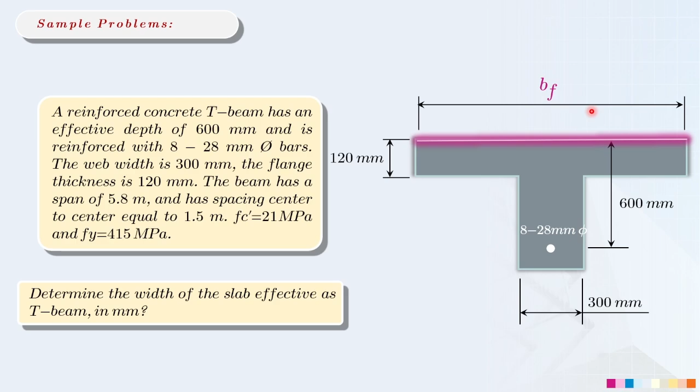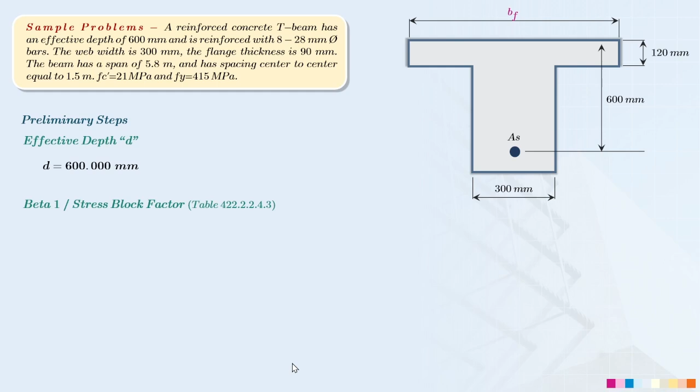and this width of the web which is equal to 300 millimeter. Okay? So ang goal natin dito for this portion of the sample problem is we need to determine first this width of the flange kasi yan yung gagamitin natin later on when we are considering the nominal moment or the bending moment of this section. Okay? So first, let's determine what is the effective depth, which is given tayo ng 600 millimeters. And then determine muna natin dito yung stress block factor or the value of the beta 1, which is dependent with your F prime C, which is 21 megapascal. So your beta 1 here is equal to 0.85.

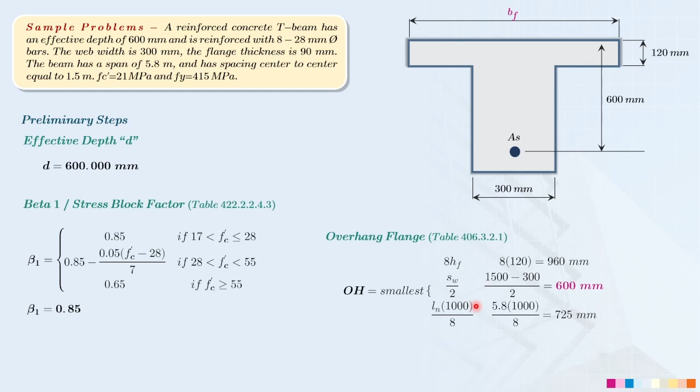Now, let's solve for the value for our overhang flange. Kasi since interior beam yung pinag-uusapan natin dito, ibig sabihin lang nito dapat ang i-consider mo ditong overhang flange is dalawa at magkabilaan sila. So kapag na-solve mo yung value ng overhang flange from this provision, you need to add this width para makuha natin dito yung total span ng ating flange itself. Okay. So these are the criteria. So tatlo lang naman siya sa ating interior beam. So first is the 8 times the thickness of the flange or thickness of the slab, and then clear span over 2. So clear span between the beams, then you need to divide it by 2. And lastly, the clear span of the beam which is divided by 8. Okay? So kailangan natin makuha dito kung sino yung pinakamaliit sa kanilang tatlo.

So first, on the first criteria, which is 8 times the thickness of the flange, so 8 times 120, ang lalabas dito is 960 millimeter. On the second one, which is yung clear span, please take note na yung clear span dito, kailangan interior beams. So please take note na yung given natin na center-to-center span, which is 1500, you need to divide it to the half of the beam, which is 300 over 2. Kaya lang kasi, kapag clear span, kailangan dalawang beam ang i-consider mo or assume dito na may katabi pa siyang isa pang beam. That's why 300 over 2 plus 300 over 2 ay mag-equal lang po siya sa 300 millimeters. That's why kung makikita nyo dito, naka 300 millimeters na po siya. Over 2, this is equal to 600 millimeter. Yan yung pangalawa nating criteria.

Then, sa last criteria natin, this is clear span of the length over 8. However, ang given dito is 5.8 meters. Para consistent siya with the two criteria, minultiply ko lang siya with 1,000 para ang lalabas sa kanya ay in terms of millimeter. So the third condition here is now equal to 725 millimeter. Now, according to our provision in conjunction with this table 406.3.2.1, we need to choose what is the smallest. So, sino ang pinakamaliit sa kanilang tatlo? So, ang pipiliin natin dito, of course, the second criteria, which is equal to 600 millimeters.

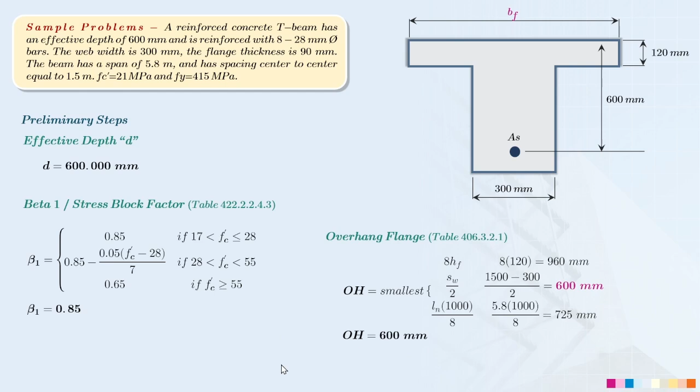Okay? Now, hindi pa tayo tapos dyan. Kasi ang hinahanap sa ating sample problem is the value for our width of the flange itself. Ang nakukuha pa lang natin dito ay overhang flange pa lang or etong nasa labas ng ating rectangular beam. Para ma-solve natin yung ating flange width, you need to add 2 overhang flanges kasi magkabilaan lang po sila. So, kaya naka times 2 po yan. And then, i-add mo ngayon dito yung width of the beam. Okay? So, substitute lang natin which is 300 plus 2 times 600. So, ang lalabas ngayon ditong width of the flange is now equal to 1500 millimeters. Yan yung answer natin for this sample problem.

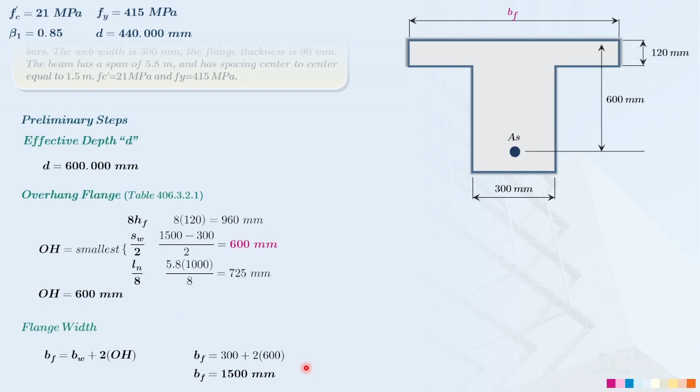Now, let's proceed in the determination of the ultimate moment capacity ng ating section. Given na nasolve na natin dito yung ating flange width, we can continue in determination for the area of compression block. Okay? So for the area of compression block, we will assume two scenarios here or two cases. The first case here, if the height of the equivalent rectangular stress block is less than the thickness of the flange. So binabantayan natin dito ay yung offset dimension na 120 millimeters.

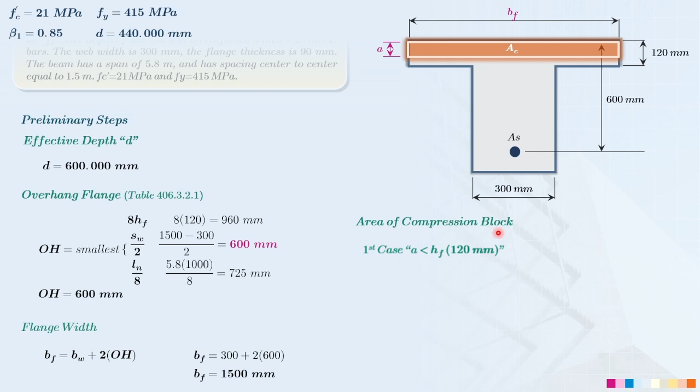Ibig sabihin lang po niyan, yan po yung magiging itsura ng ating area of compression block. Which means kapag kinuha mo yung area of compression block based on this figure, so this is width of the flange multiplied by the height of equivalent rectangular stress block. So yan yung itsura niyan, no? Or ito yung magiging derived formula natin.

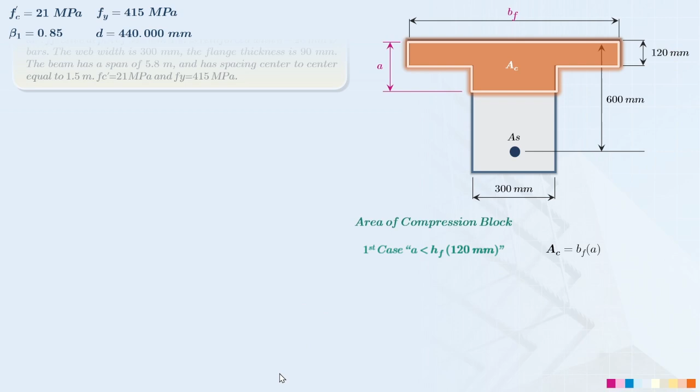Yung second case naman natin, kapag yung kanyang height na A is greater than 120 millimeters. Okay? So, ibig sabihin lang nito, possible na kasi na yung height ng ating A, bumaba na siya hanggang sa web section ng ating T-beam.

That's why, kung obserbahan ninyo na mabuti yung itsura ng ating area of compression block, magkakaroon tayo ng dalawang area dito. First is yung flange, which is kapag kinuha mo yung area, width of the flange multiplied by the thickness. Okay? Yung pangalawa naman, yung nasa web section or yung nasa ilalim. Para makuha mo yung remaining height natin, you need to subtract yung thickness of the flange sa value ng A. Para makuha mo yung area, i-multiply mo ngayon siya sa width ng ating beam.

So, yan yung magiging cases natin on this portion. First case, kapag hindi siya lumagpas ng 120 millimeters, and yung second one naman kapag lumagpas na siya ng 120 millimeters. Okay? So, let's proceed with the steel assumption. Dalawang assumption ang gagawin natin dito. Una, sa yielding ng bakal. Pangalawa naman, sa case ng ating area of compression block.

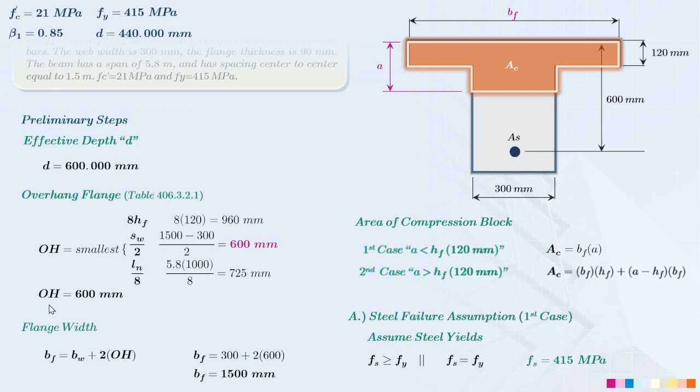So, ang gagawin ko, I will assume first that the steel yields. Then followed by na yung geometry ko ng area of compression block ay nasa first case. Ibig sabihin lang po niyan, hindi po lalagpas ng 120 millimeters yung aking value ng A. So, yan yung magiging condition natin. Okay? So, mag-yield po yung mga bakal natin. So, let's proceed with the next solution.

Alright, so let's have this assumption na ginawa natin kanina. Sa first case natin, dapat hindi na siya lalagpas ng 120 millimeters. So, we will use this first formula na na-derive natin in the determination of the area of compression block. What we need to do here is we need to use the equilibrium, no? Ang gagamitin natin dito ay yung galing sa non-rectangular sections, yung ginamit natin kanina sa ating derivation, which is yung area of the compression block dito, it should be width of the flange multiplied by A. Okay? So, let's substitute lahat ng ating given.

So, lumalabas na yung value ng ating A is equal to 76.351 millimeters, which is less than 120 millimeters. Ibig sabihin lang po niyan, tama yung ating assumption sa first case. So, let's compute first yung value ng neutral axis depth, C, as 89.825 millimeters. Dahil yan po yung gagamitin natin as our checking doon sa una nating condition if mag-yield yung mga bakal natin. So, I will substitute this value of C and then yung ating effective depth para makuha natin yung actual rebar strength.

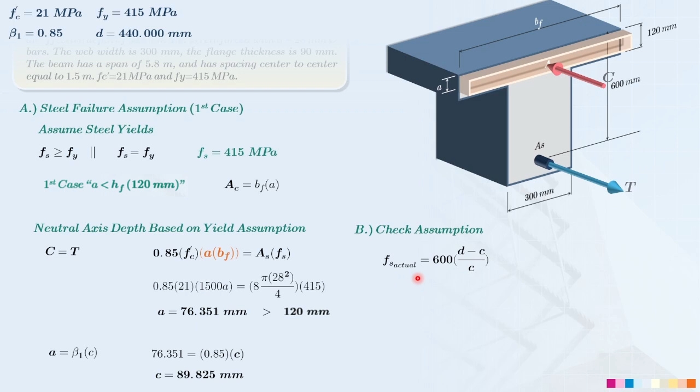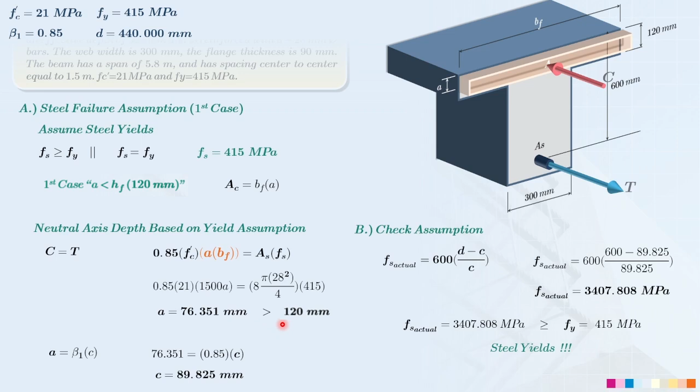So by simply substituting everything, ang makukuha nating rebar strength is now equal to 3,407.808 megapascal. Okay? In comparison with our 415 megapascal yielding strength, our steel rebar yields, or the assumption steel yields is correct. Ibig sabihin lang po nun, tama na yung assumption natin na mag-yield talaga yung ating reinforcement. At the same time, nag-satisfy yung condition natin for the value of A na dapat hindi na siya lalagpas ng 120 millimeters. Alright, so once na na-prove na natin yung ating assumptions, we can now solve for the strength reduction factor.

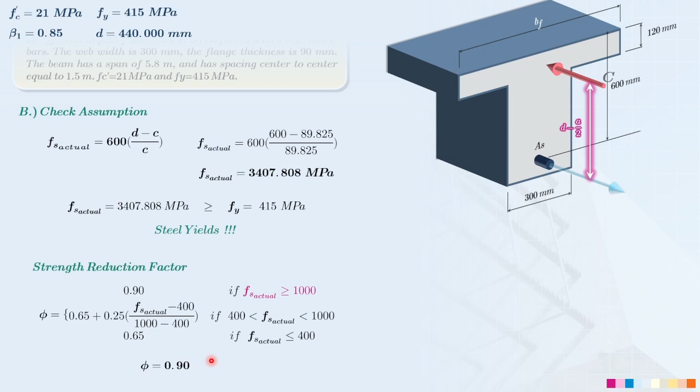So of course, mas maganda dito kung ang magiging basis natin is based on rebar strength. Yung ating rebar strength, which is 3,407.808 megapascal, this is more than 1,000 megapascal. So, yung strength reduction factor natin, this is now equal to 0.9. Ibig sabihin po niyan, class, this is tension controlled section. Okay, so now let's determine the flexural strength of our section. I will now proceed with the design bending moment, which is based on this criteria.

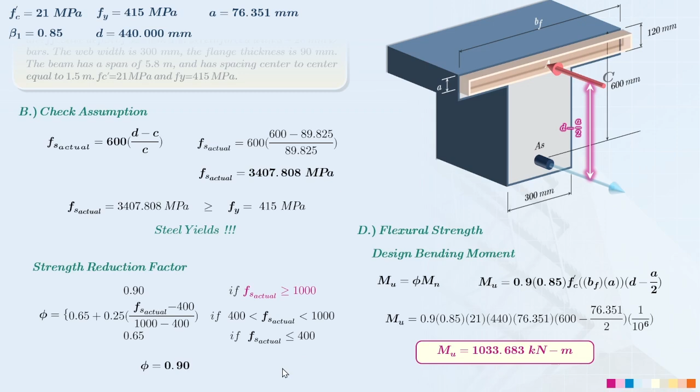Ang case natin dito ay yung value ng A ay hindi lumagpas ng 120 millimeters, so we will use this derived formula. Yung strength reduction factor natin, nakasubstitute na siya as 0.9, and isubstitute na din natin yung ibang given. Ang masosolve natin for the ultimate strength is now equal to 1,033.683 kilonewton meter. Ibig sabihin, class, based on this section, ang kaya niyang dalhin na bending moment in terms of ultimate strength is 1,033.683 kilonewton meter. So, yan yung ating sample problem for this T-beam, if the value of A is not more than 120 millimeters.